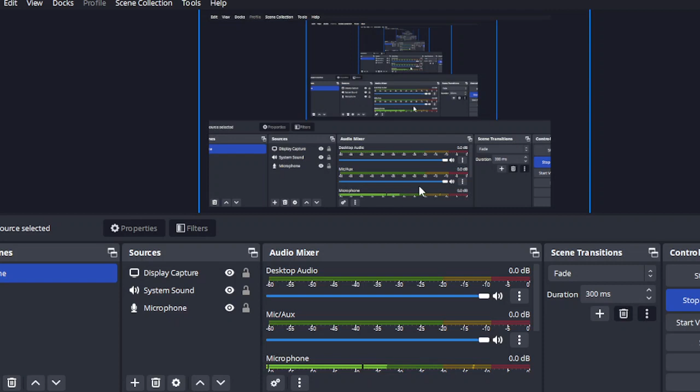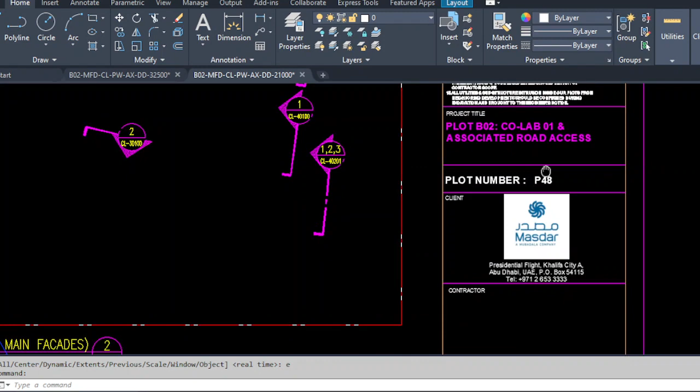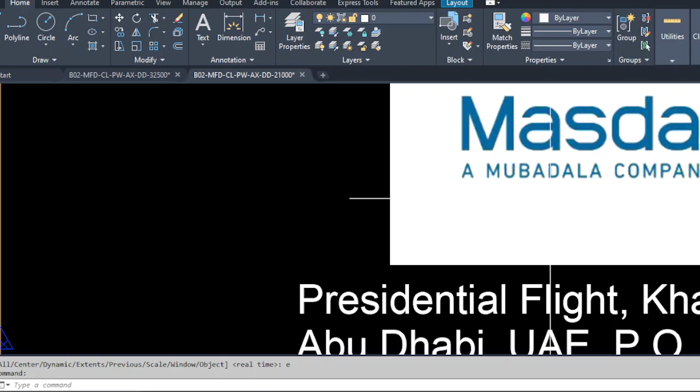I'm here to share with you again a Revit file that I made. It's about this building. This project is the Co-Lab building of Masdar City in Abu Dhabi or Dubai. The client name is Masdar Mubadala Company. This is their address. The contractor is Facade Consultant, Meinhardt.

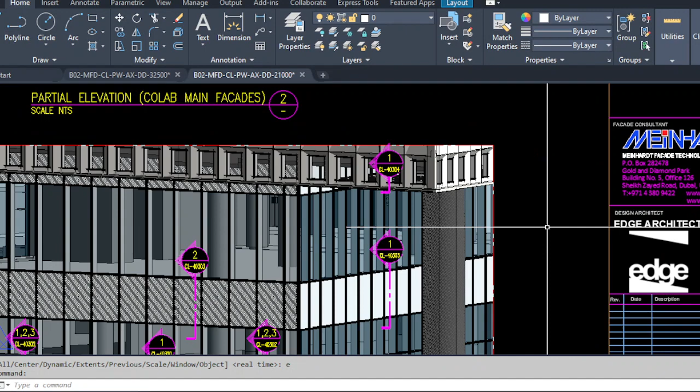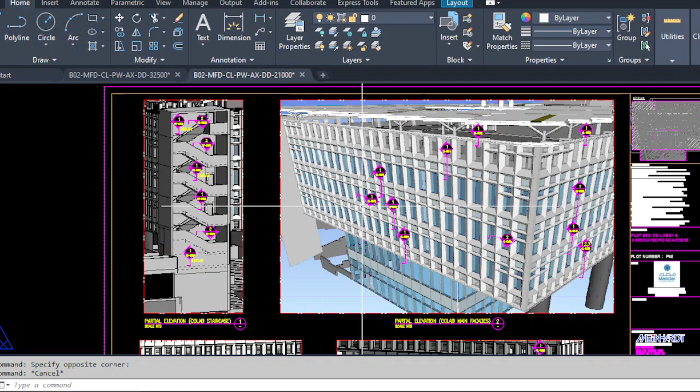Then the architect is Edge Architects. And guys, this is the building. As you can see, they just inserted it, because this is not a 3D Revit file. They don't know how to make a Revit file of this building. They just inserted an image. This one is an image only. Also this one is an image. This one is an image. Also this one. When you go to the model in AutoCAD, inside there's no drawing. All is image only.

This project was given to me by a good person. They asked me to do the facade, the BIM facade of this building. This is Masdar City, 5 buildings. First we're going to do this building. We will not mention the other 4 buildings.

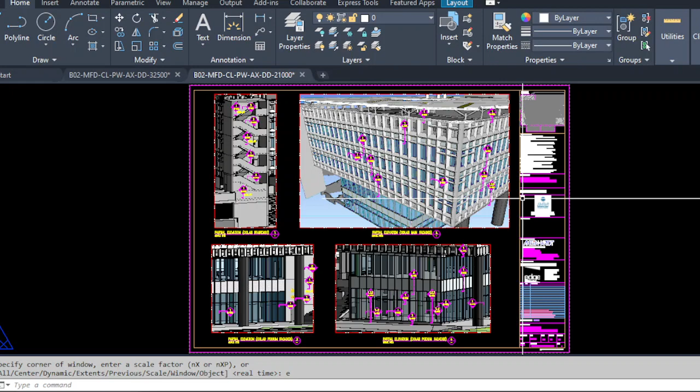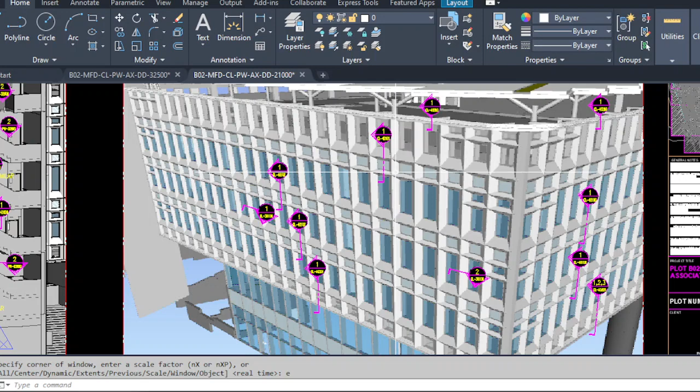Here guys, you're going to see that this is a double facade. Underneath is glass, a curtain wall, and I don't think it is unitized or stick system. And on the outside, it's a cladding. I think it's ACP cladding. But what amazed me here, guys, is when you see here a column. It has a cladding, ACP cladding.

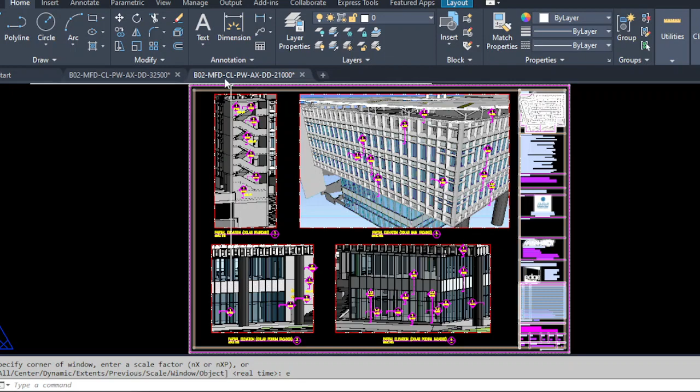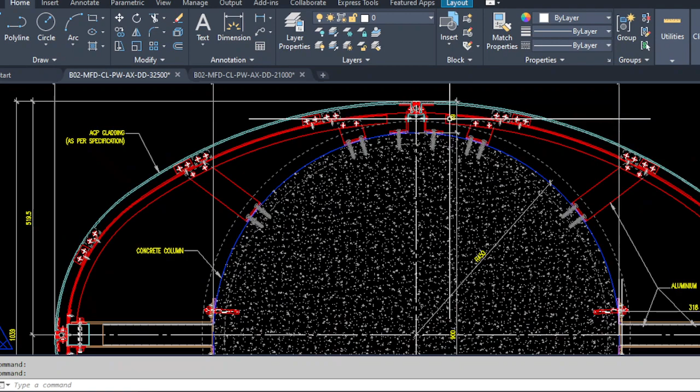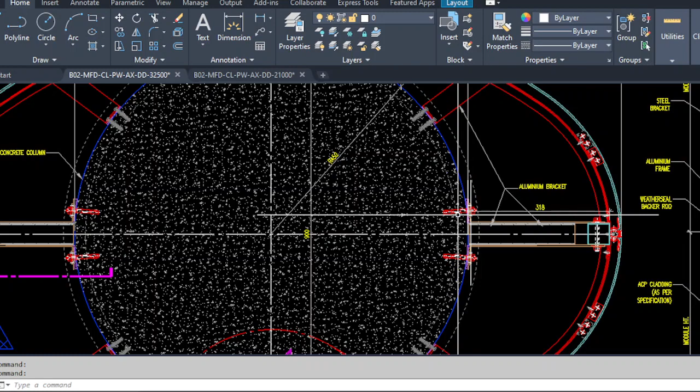Let's go to the detail of that column. This is the detail of the column, guys. Based here, the shape of the column is a circle, and the cladding they made ellipse and divided into 4 parts. This one is the fixing. This is the end of the cladding, and this is the end of the cladding also here. They use aluminum brackets. They fix it here on the column.

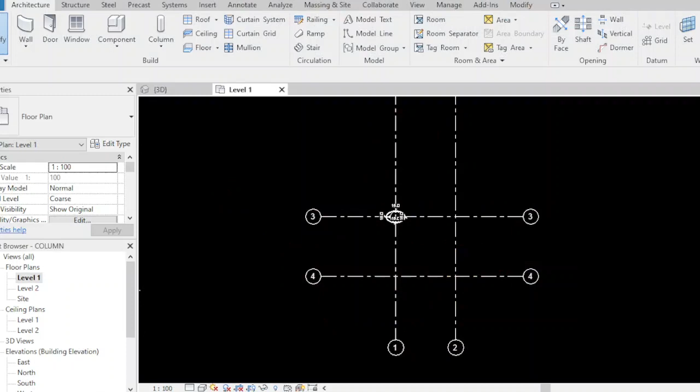Guys, on YouTube you will not see any Revit files that make this kind of cladding, column cladding. I want to share with you what I made. This is the Revit file of this cladding. Based on the BEP, BIM execution plan that I have, these are the requirements of how to make a Revit product model specification.

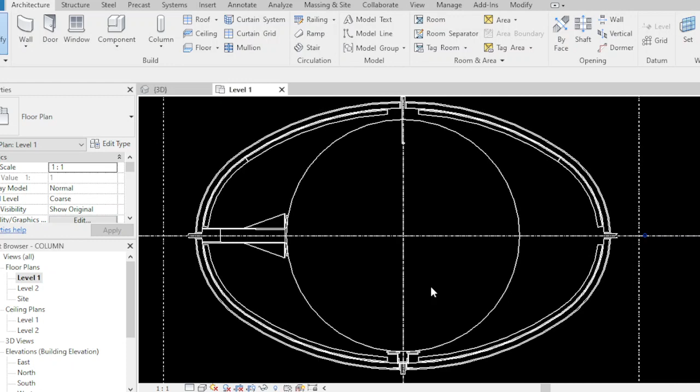Guys, as you can see, there's a grid and the column is here. Let's make it small, 1:1, and zoom it in. Guys, this is what I made, the Revit file of the column cladding. As you can see guys, when you read the Revit product model specification, levels and grids define the reference on this part.

Let's start it again. Revit version: I made this one in Autodesk Revit version 2021. Next, model units: specify the units of measurement for the model, feet, meters. This one is in mm. As in the last video that I made, I can make English or metric Revit models. This one is in mm.

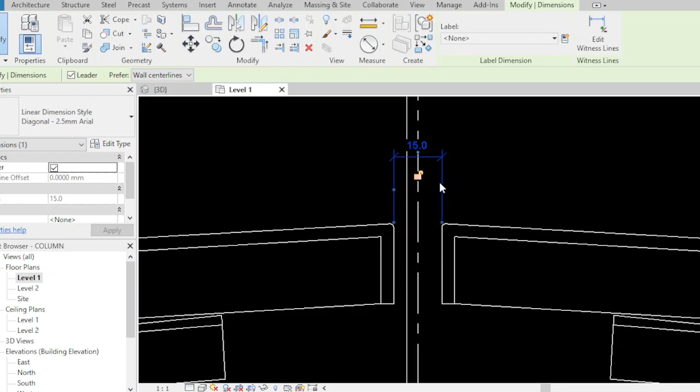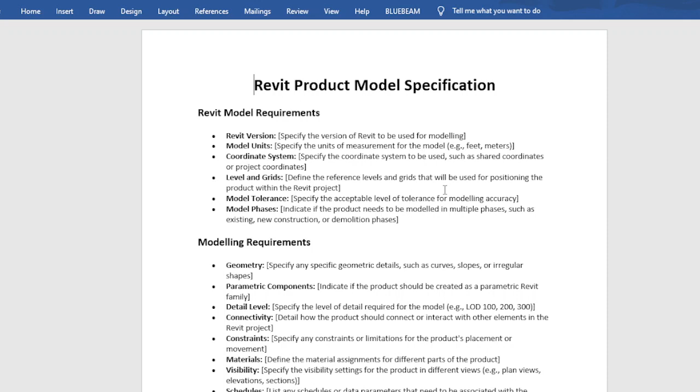Coordinate system, especially shared coordinates. These files that I made, you can put in shared coordinates or project coordinates. It's the same. You can put it on every project that you coordinate with. Level and grids: define the reference levels and grids that will be used for positioning the product within the Revit project. Guys, as you can see, I have a level and grids. This is the grid, it's the center. And the level is here.

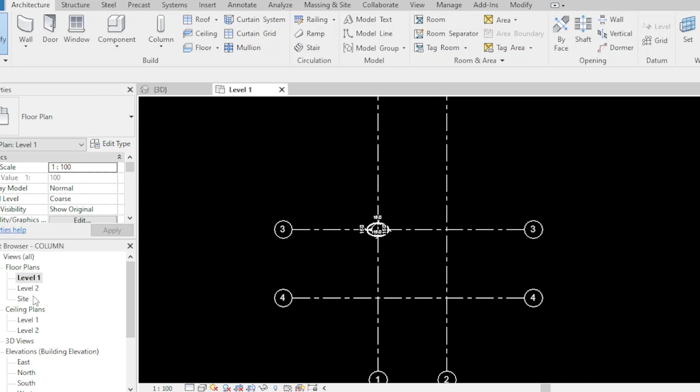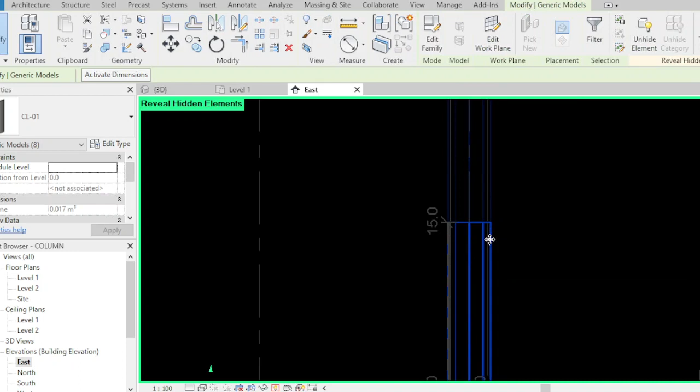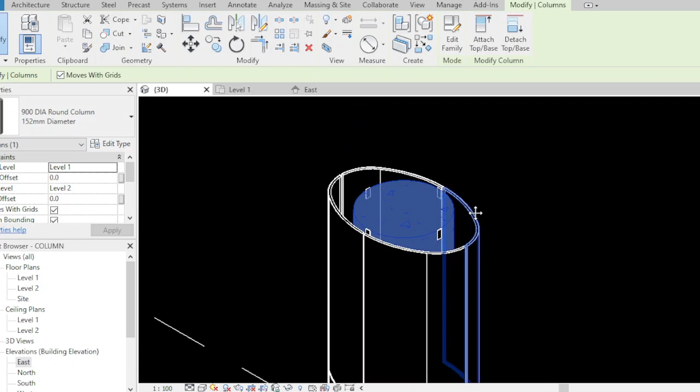Level 1, level 2. When you click on the elevation, as you can see guys, there's the elevation of the building. Let's select all instances so you can view all the cladding and hidden elements. There's the cladding guys. When we go to the 3D, as you can see guys, there's the concrete column, and these are the 4 claddings. 1, 2, 3, 4.

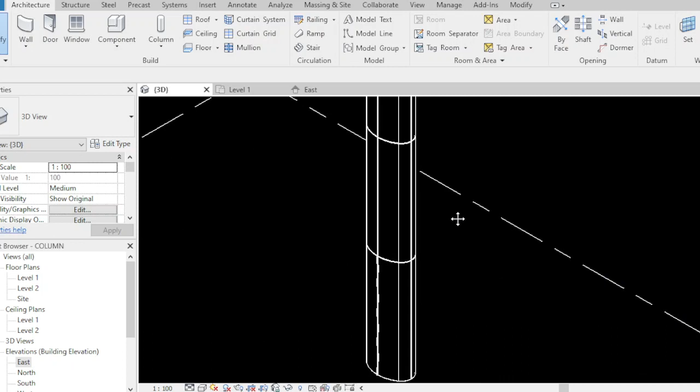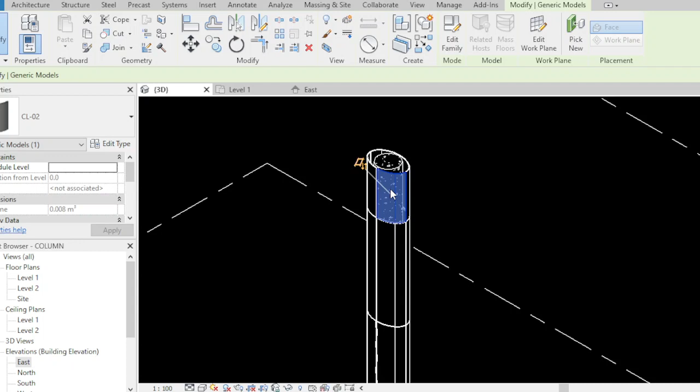Guys, on the internet you can't see anything like this. This is the first time you're going to see this file, a column with cladding that has its own name, material name. Also, I can extract all the files of this material so that we can fabricate it. We can also make an extraction for the BOM, bills of materials, BOQ, bills of quantities, and material list. I can make the extraction here in Revit.

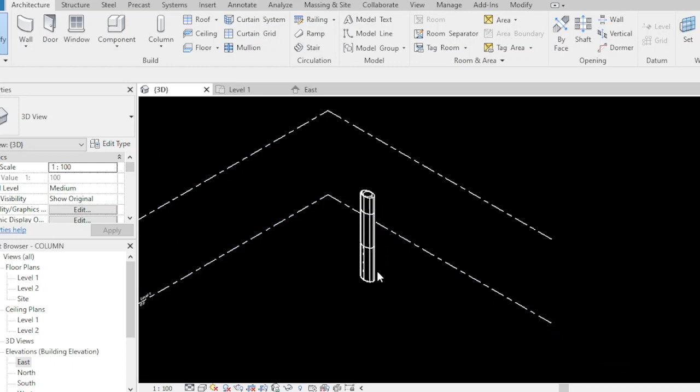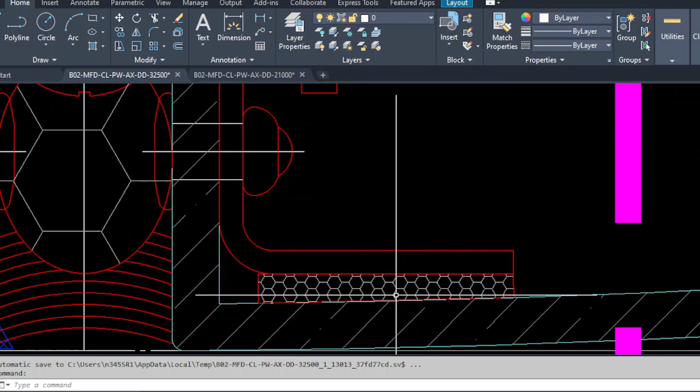Let's zoom in the detail. In AutoCAD, they have a detail on this part. As you can see guys, there's an angle, there's a bracket, and there's an angle, I think, that's been repeated to this ACP. Then they put a bracket here, then put the screw here.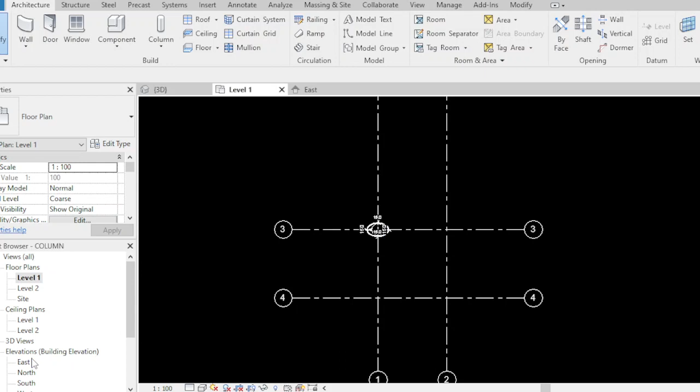So let's go to the Revit file. There's no section. Let's go to the section. Where's the section? Let's make a section here.

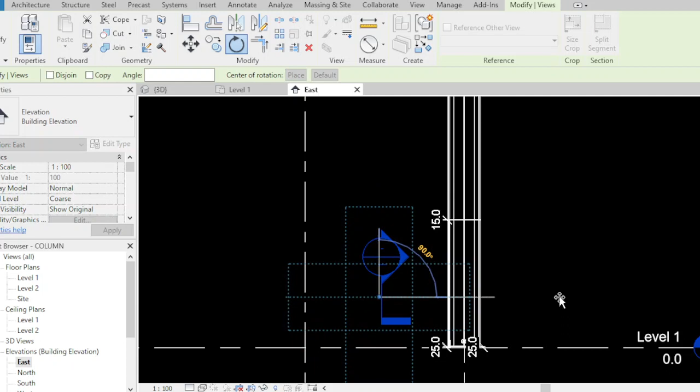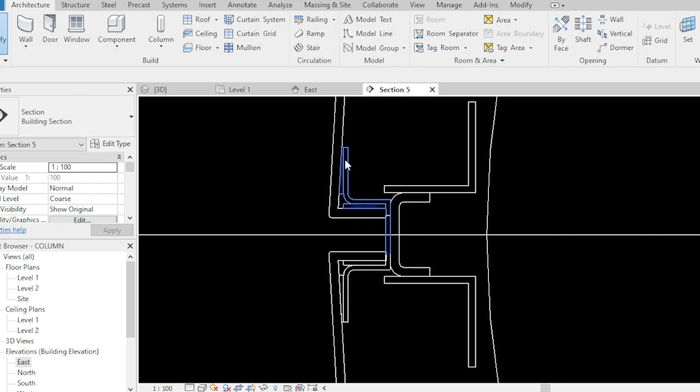And put it here. And let's go to the view. As you can see guys, there's the bracket, same as this one. I think this is what you call a double adhesive tape, structural double adhesive tape, and repeated to this one. This is the aluminum angle. I think it's 100 or 200 in length.

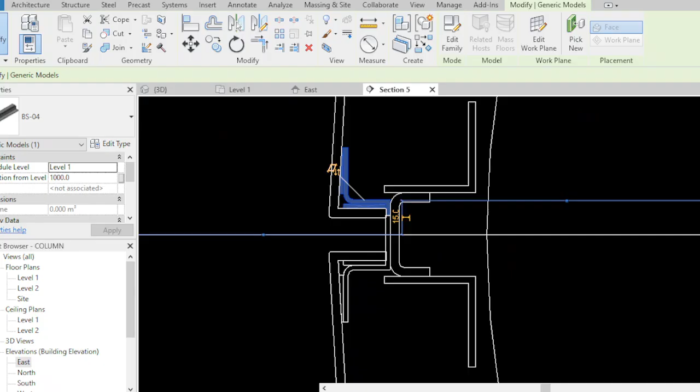Both sides they have to fix in the center of the bracket. This one, let's go to the files. As you can see, this is the aluminum, and we have the double adhesive tape here and here. As you can see, guys, there's a double adhesive tape. This is a Revit file, guys.

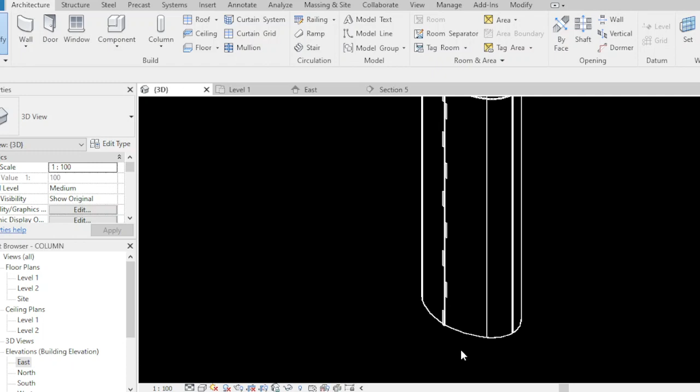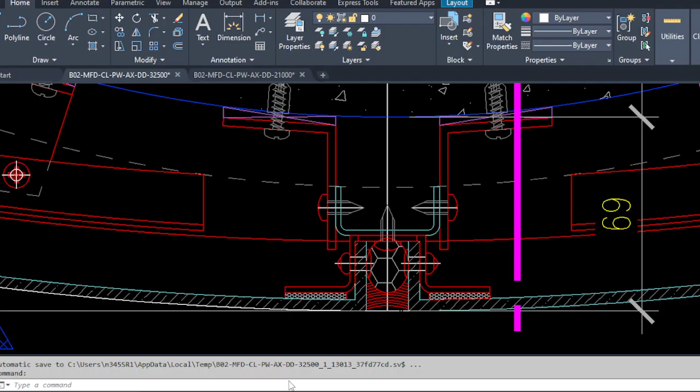I want to show you this one. On the 3D, let's hide this one and the other ACP, and you can see, guys, there's the 3D of the runner, U-channel runner. This one, what do you call this one? The U channel is here. This cyan is the U channel runner.

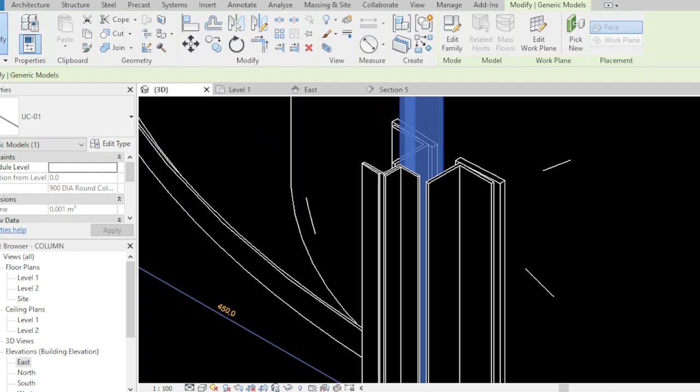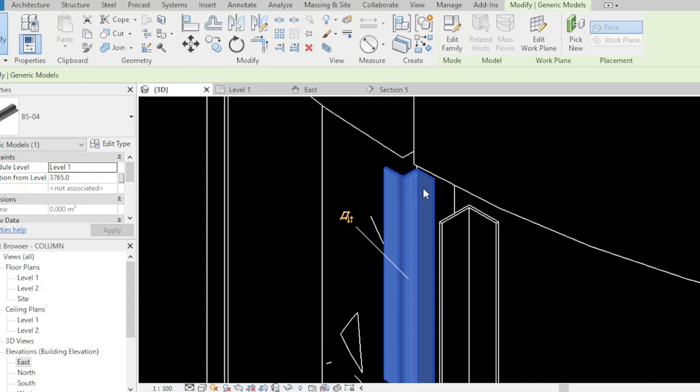Let's go to the Revit files. There, this is the U channel runner. This one. There's this, guys. It's been highlighted. As you can see, it's the same as in the AutoCAD. And there's a staggered aluminum angle that will be fixed on the center of the runner, and also, as you can see, it has a double adhesive tape on both sides on the face of the ACP, so it can carry the ACP.

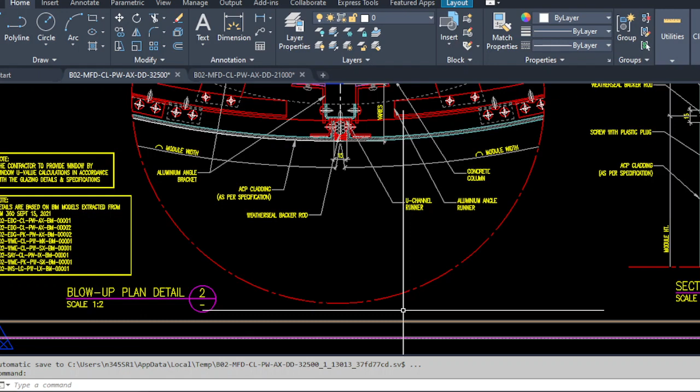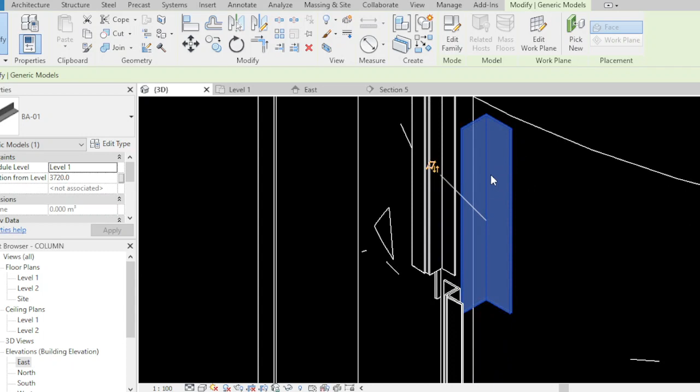Also, we have the aluminum angle bracket that holds the runner. As you can see, guys, we have the aluminum bracket, and I can put a fixing here to fix in the concrete. The location of the aluminum bracket is the same as in the AutoCAD. Look, there's another one.

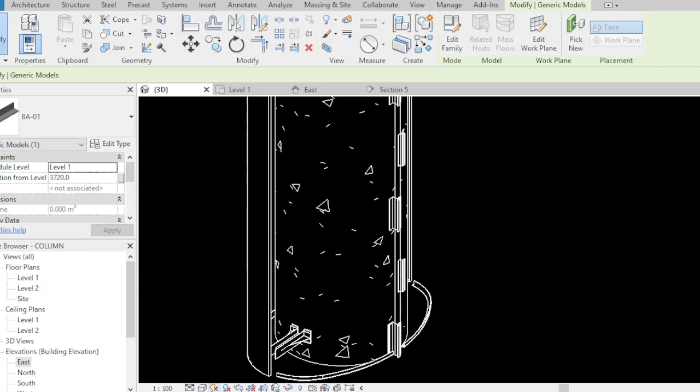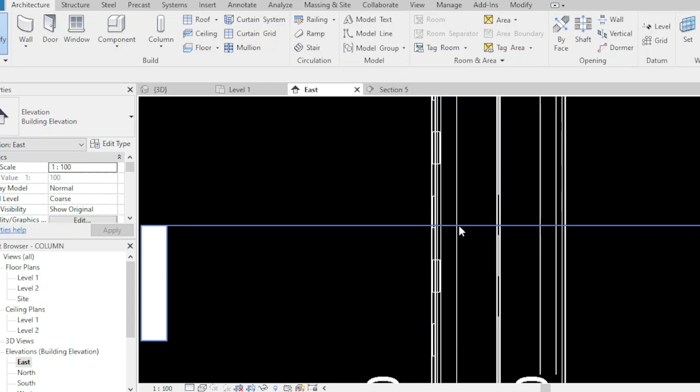So, if you want to see the section on that part, let's go again to the east and click it here. Let's put it here and let's go. You will see there's the runner. Oh, there's no bracket. Let's go to the east again so we can see the bracket. There's the bracket here. Let's go to the view.

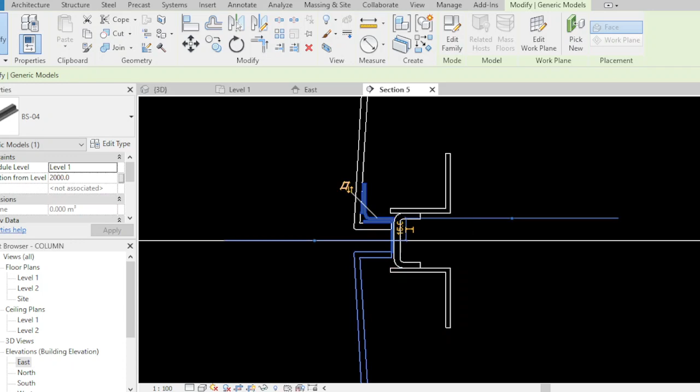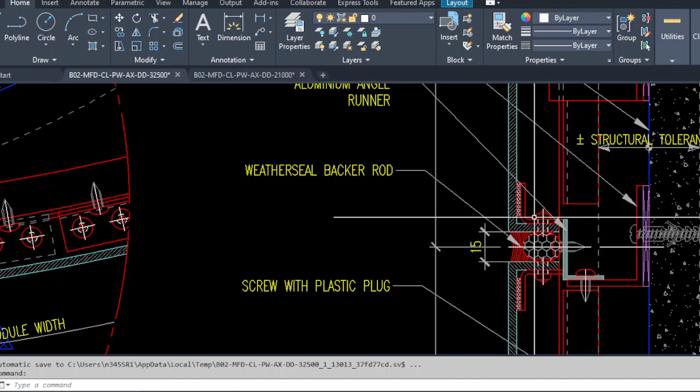As you can see, guys, there's the U channel runner, and here's the aluminum angle bracket, and also we have the angle. There's no detail on this one. Here, this one is the aluminum bracket, also aluminum bracket angle runner. We also have the runner.

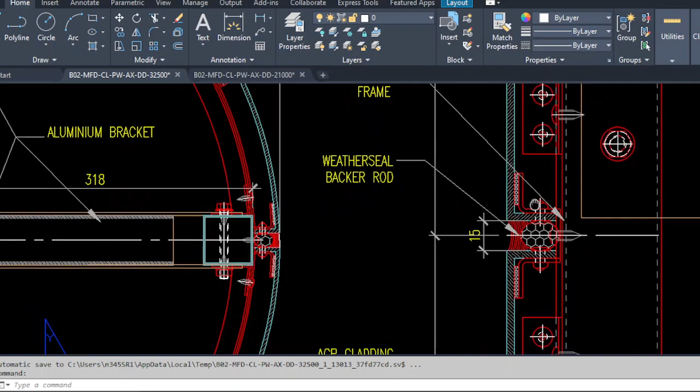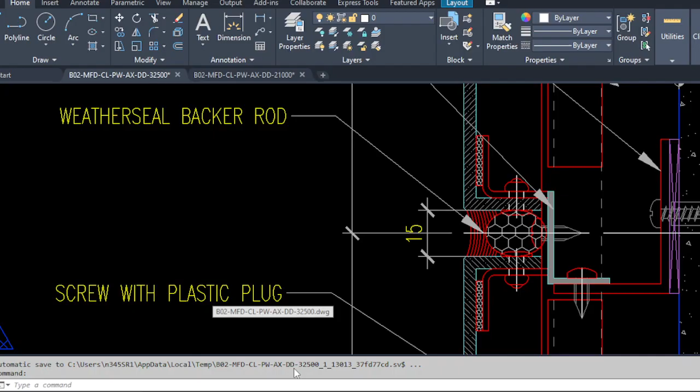Let's go to this one. There's no name for this one. They don't put a name on this one. Aluminum frame. We're looking for the name of this one, but they don't have one. But this is the angle with the structural double adhesive tape. So as you can see guys, there it is. So based on the AutoCAD details that we have, we met the criteria in the Revit files.

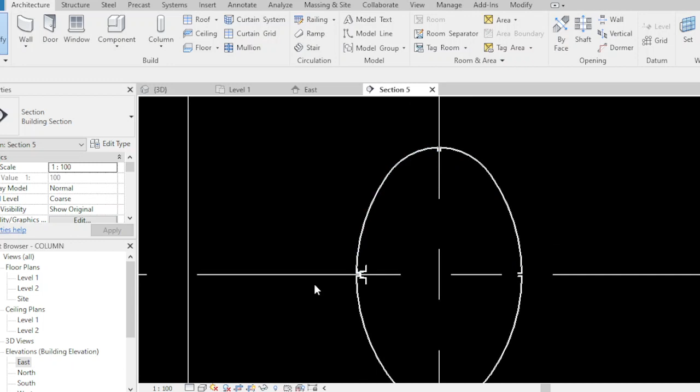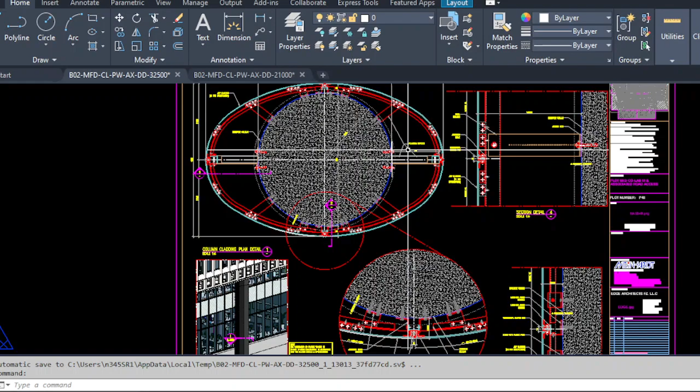Also, I can put a bolt here on our column, so we can fix on the circular column. Let's go to the 3D. We are finished here, right? And the other one is here. As you can see guys, based on the other detail, this big aluminum bracket, they don't have a detail. I just made the detail based on the AutoCAD that they have.

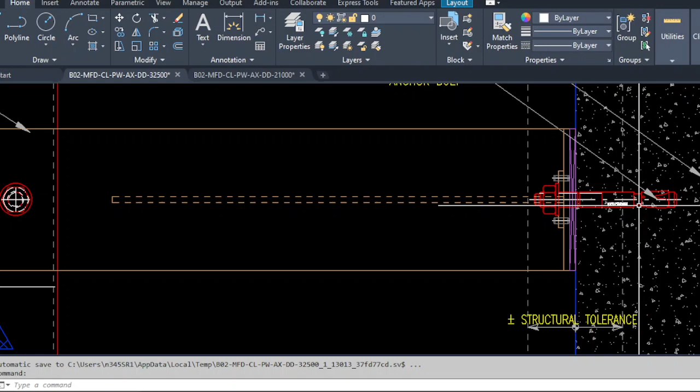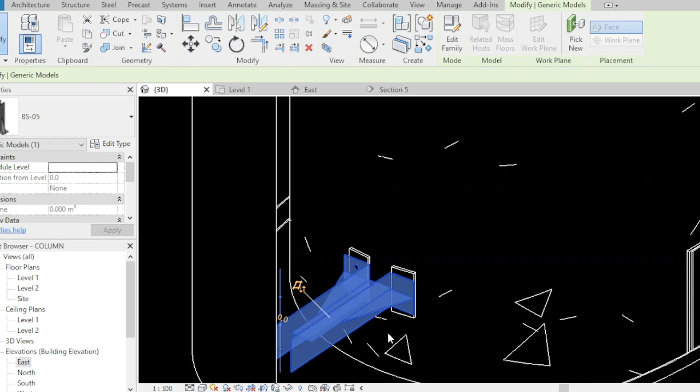The details of this one, steel bracket. The steel bracket is fixed on the concrete column. It has a gusset plate here, and it's angled, and has 3 mm I think on the center. Let's go to the Revit files. As you can see guys, there it is. I put holes to show you guys that there's a fixing for the bolts.

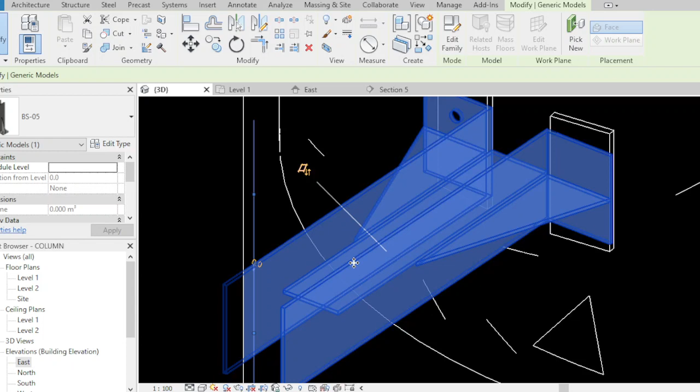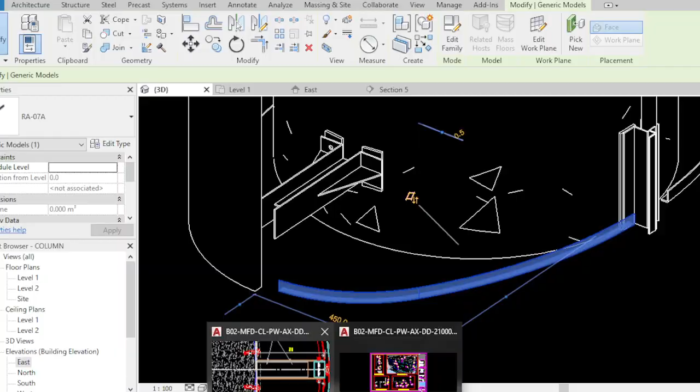Then on the inside, it has this one. This is the gusset plate, right? This is also a gusset plate inside. This one is the shim. Because it's circular, we need a shim, at least 6 mm shim to fix with the bolts. And also guys, this is the runner, a half ellipse runner, so we can fix on this one. This is the half ellipse runner.

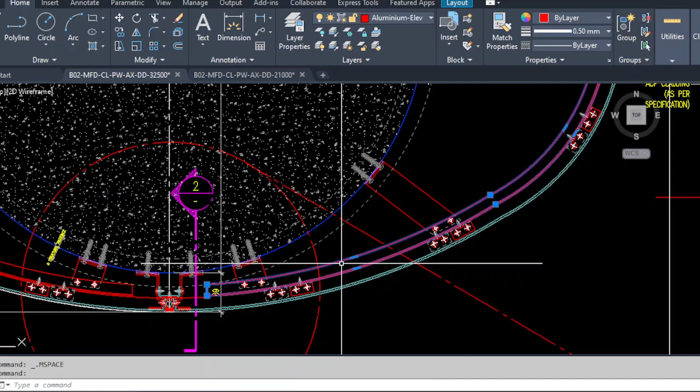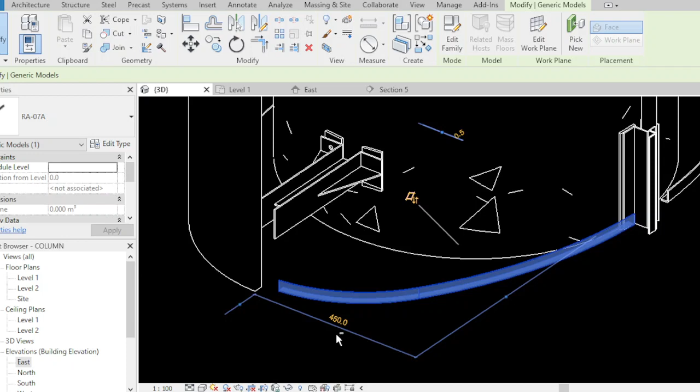From here we have the half ellipse runner going through here, and it has a mirror again in here. Yeah, this is the half ellipse runner. So we can fix here and on our concrete column. So when we go to the Revit file, there's the half ellipse runner. As you can see guys, it's ellipse. Look, it's letter L. It's angled, so we can fix on the side.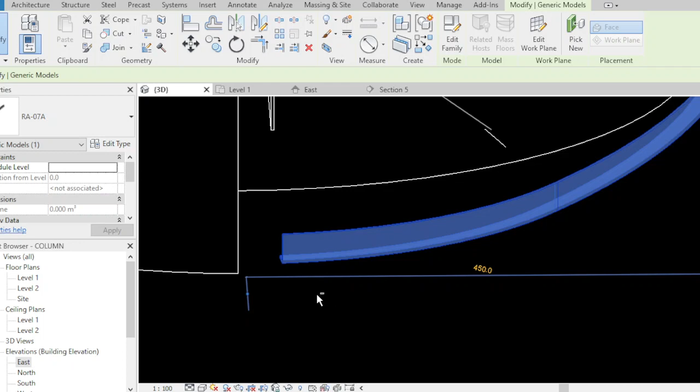I hope you understand that this is a Revit file, not AutoCAD. Just like I said, this is the first time you're going to see this on the internet, because no one can do this. I think AI cannot do this. Also Athena cannot do this. Evolve Lab cannot do this. Evolve Lab, I challenge you to do this. Also the Athena software, I want to challenge you to do this. Also this one, look, it's in 3D and it's a Revit file, and it's a Revit family guys.

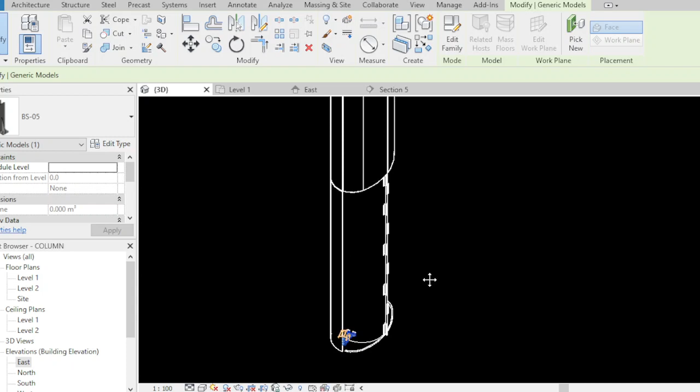I hope you learn something from this, that Revit is a very powerful tool in making facades. It can make a cladding, a stone cladding, or a metal cladding, also a curtain wall and facade. Curtain walls, stick system, or any other system that we may know.